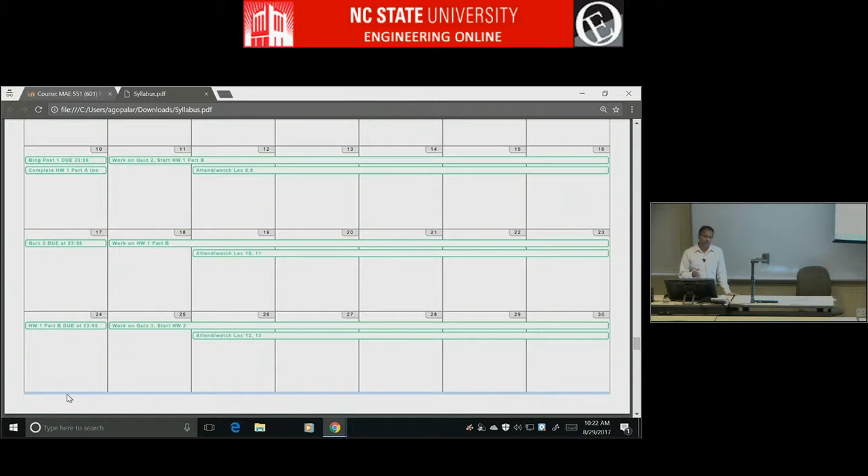So that's what this calendar has. Of course, some things are going to change as we go along. Maybe there will be some material I don't end up finishing, and we might postpone something a little bit. But this is the plan.

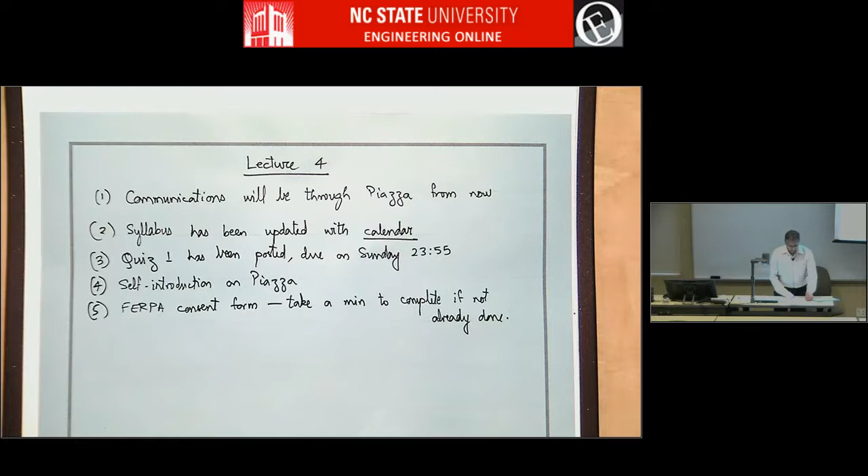In the last class we talked about CP distribution, this is from page 3-11. This was an example CP distribution, and the main thing is it's plotted upside down so that it looks similar to the velocity distribution, letting us think about those two plots in the same way instead of having to flip your thinking with one plot or the other.

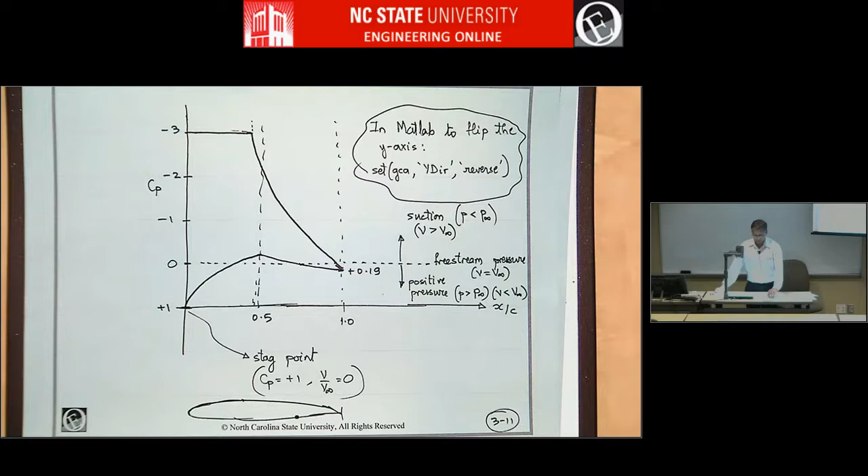From the CP distribution you get pressures, and that's where we stopped. Positive CP means it's a positive pressure, so it will press on the surface, and we have dF equals minus P dA, where dA is the elemental area vector pointing along the outward normal.

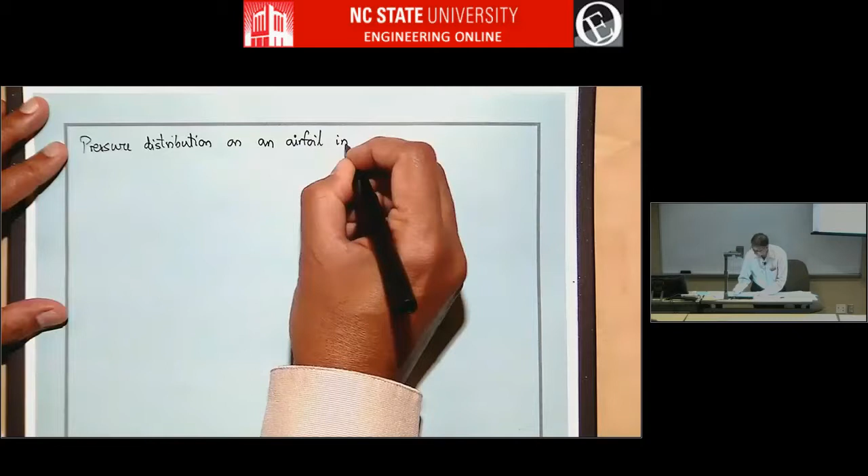Okay, so now let's see how we can proceed and calculate lift and drag and all those things. First, let's look at a pressure distribution on an airfoil in inviscid flow. This is just going to be a very representative pressure distribution - it's not always going to be like this, it's just for some airfoil at some angle of attack, and it will change for different airfoils and angles of attack, but this is just a representative one.

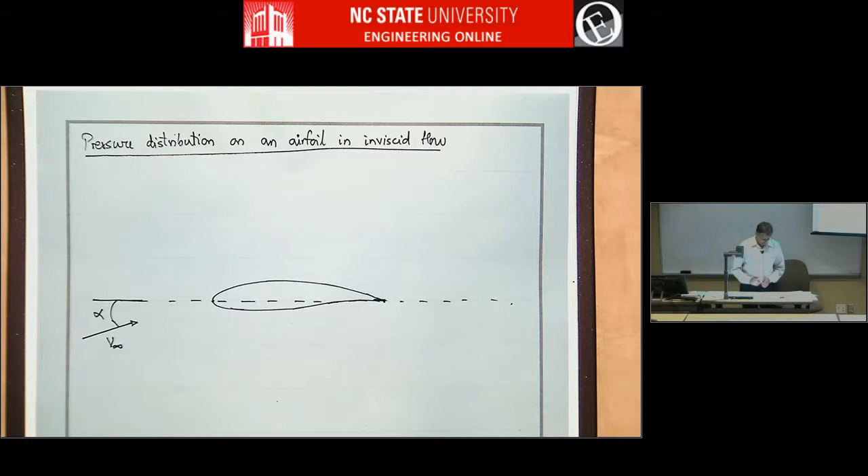Let's say here is an airfoil, and this is V infinity, this is the angle of attack. I usually draw this angle pretty large so you can see it clearly in the graphical sketches, but this is a very large angle of attack - usually angle of attack is something like 0 to 12 or 15. Okay, so you might have a pressure distribution like this.

Okay, so this might be some pressure distribution. This is an inviscid flow - inviscid flow means no viscosity, which means no boundary layers, no drag. As we shall see later, inviscid flows are a very useful approximation to study many airfoils and wing flow situations. So although they differ from reality, they are a useful approximation for many cases.

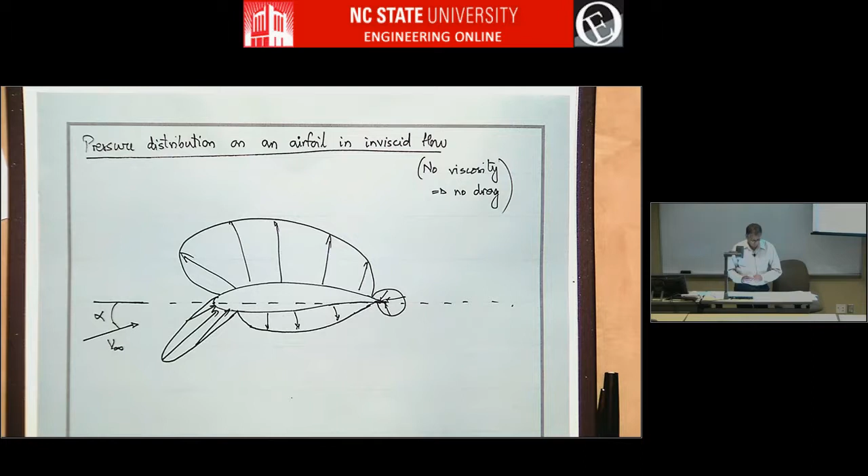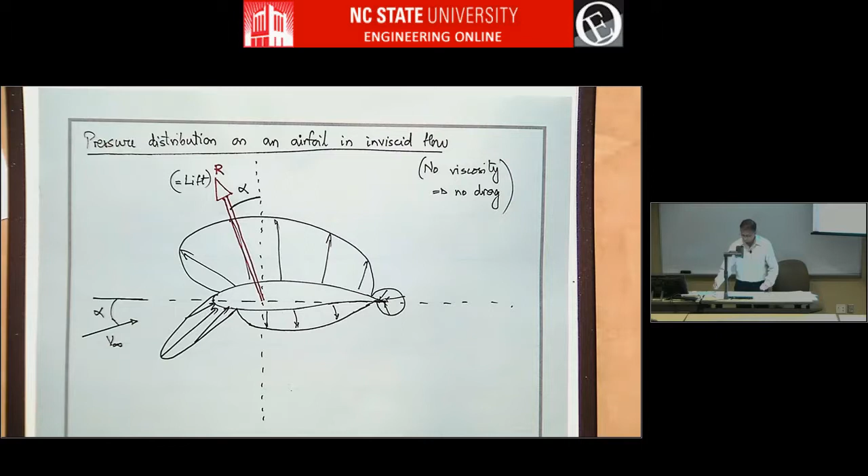So this pressure distribution will end up causing a resultant force, and this resultant force will be something like this. In inviscid flow, this resultant force will also act at an angle of alpha from the vertical, and this R is equal to lift. So R is the resultant force, and this is the force you will get if you integrate all these pressures, and this is equal to lift.

And lift by definition is the component - this is important to remember. We have a resultant force and the component of that resultant force in the direction perpendicular to V infinity is called lift. You will come across some situations, maybe not as much in this course but in other places, where you will wonder what lift is. Lift is always the component perpendicular to V infinity. In inviscid flow, the only force acting is lift, there is no drag. So the resultant force itself is the same as the lift.

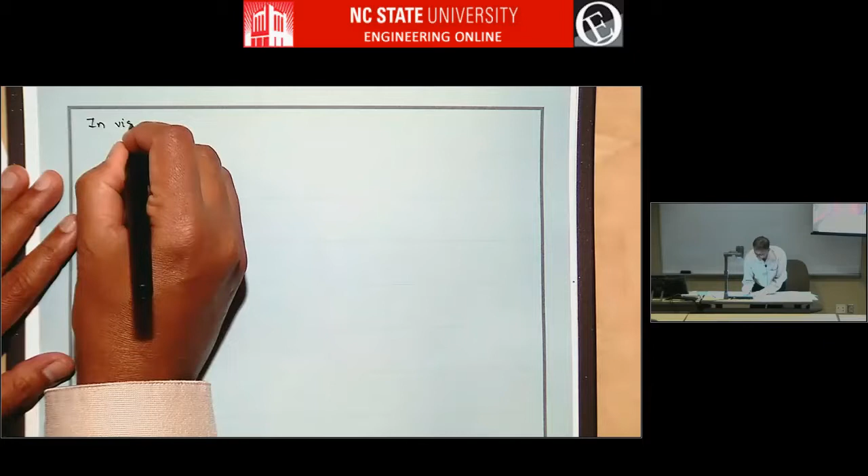That is, this is the more general case, which means, in other words, this is a real flow, not an approximation.

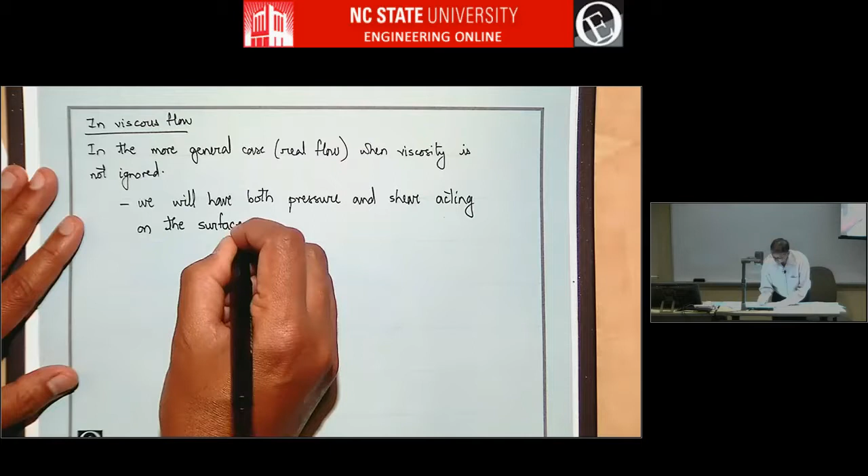So in these viscous flow cases, we will have both pressure and shear acting on the surface. So in the earlier diagram we had only pressure, but we'll have now shear force as well. And even the pressure distribution...

So in inviscid flow, if you integrate the pressure, you get purely lift, no drag. But in viscous flow, if you integrate the pressure, you will get not just lift but also drag. So this is called pressure drag. That is, there is pressure drag.

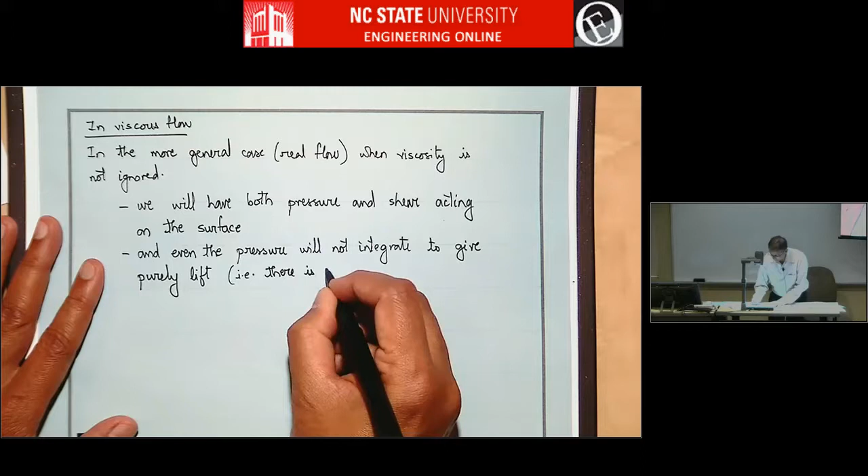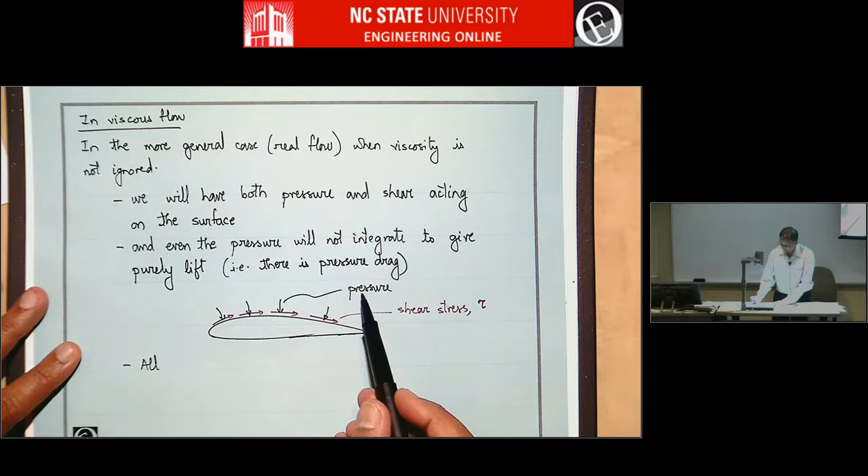Okay, so if I take an airfoil for example, you will not only have pressures, but you will also have shear stress. And shear stress is basically the frictional type of scrubbing kind of stress. And this is represented by symbol tau. And this is the pressure distribution. And on any body, all the aerodynamic forces come from the pressure and the shear. These two are the real only sources of aerodynamic forces.

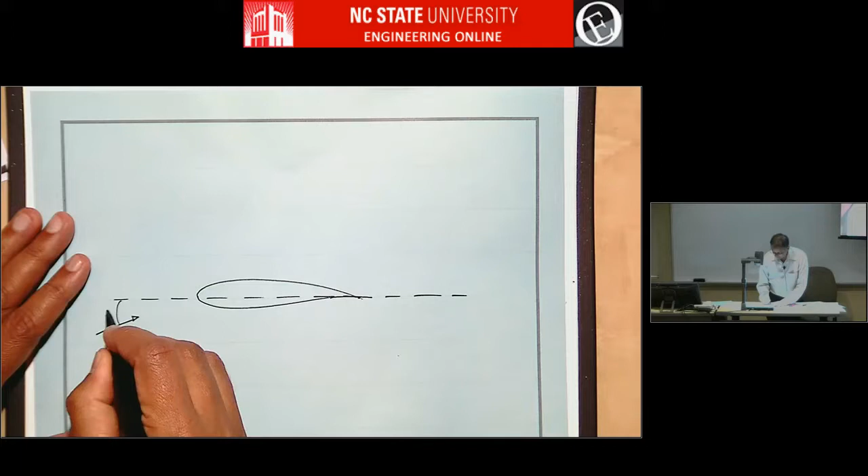So what happens in viscous flow is there is now lift and drag. So let's plot the force diagram on an airfoil in viscous flow. So we have an airfoil here, V infinity, and this is alpha, and let me draw a vertical line, and then let me draw perpendicular to the V infinity.

So this line is supposed to be perpendicular to V infinity, so this angle is alpha. May not be perfect, but it's just a sketch.

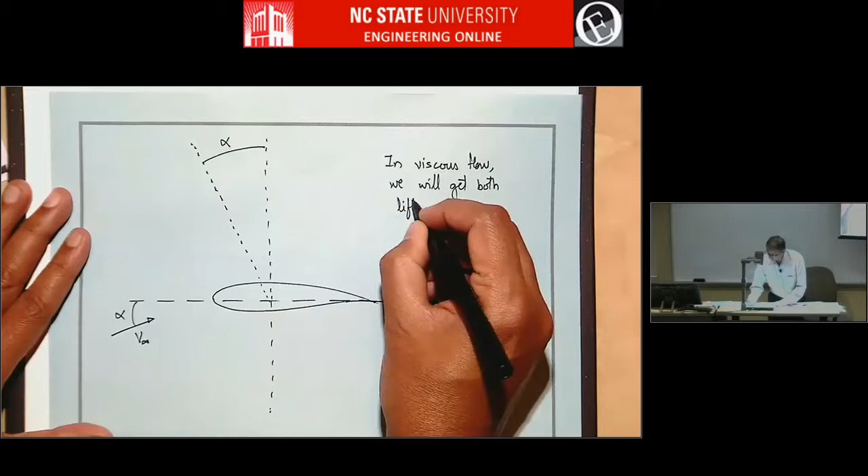So in viscous flow, we'll get both lift and drag. And so the resultant force will be a vector addition of lift and drag. So you might have a resultant force that looks like this. So we'll call this R, resultant force.

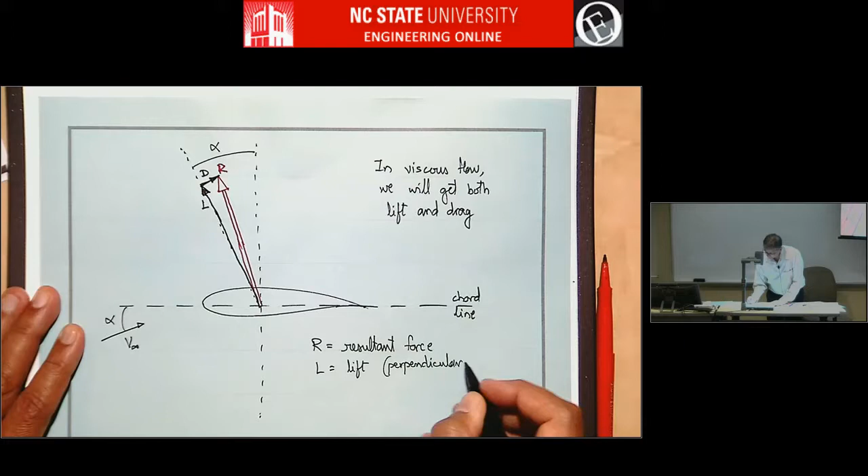So by definition, lift is the component of this resultant force perpendicular to V infinity. So you take this resultant force, this is perpendicular to V infinity. So you have a component perpendicular to V infinity and parallel to V infinity. So this is lift and this is drag. So R here is resultant. D is drag, and that's along V infinity.

In some situations, it's also convenient to decompose the total force, the resultant force, into normal and axial forces. So normal to the chord and along the chord. And I'm going to call that X and Y. So let's call this the X axis, and the Y axis is here. So I'm going to call this the Y force is this.

Sometimes it's called normal force with a symbol N, but really it's just different symbols meaning the same thing. And this force is called X force or axial force, A.

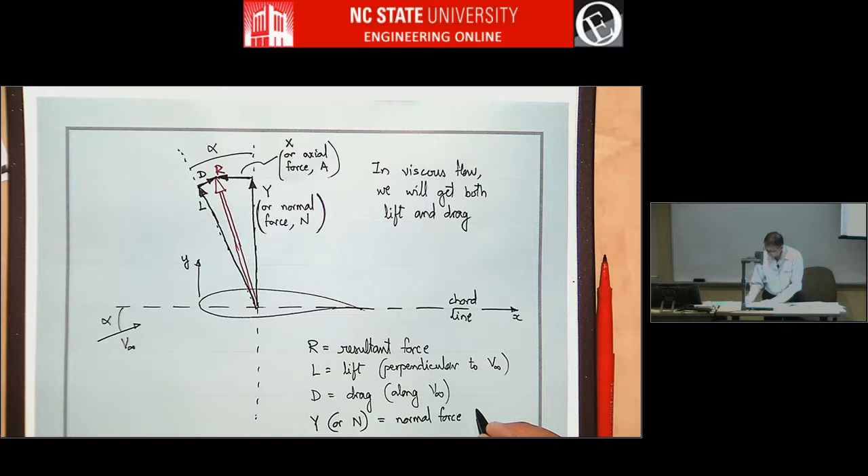So let's write these down. Y, or sometimes N, is equal to the normal force that is perpendicular to the chord, and X, or sometimes called A, is the axial force along chord.

And usually you will call X force positive along the X axis. So the X force as shown above is negative, right. So in this particular sketch the X happens to be in the negative X direction, so it's negative as shown in the sketch.

One of the things you see here is X is actually pointing towards the leading edge, which is, think about it, that's... it takes some time to get used to it, right. That means there is a force, and this is a completely legit force. This is a good resultant force for an airfoil. This is a normal kind of thing, this is not just a sketch, this can happen.

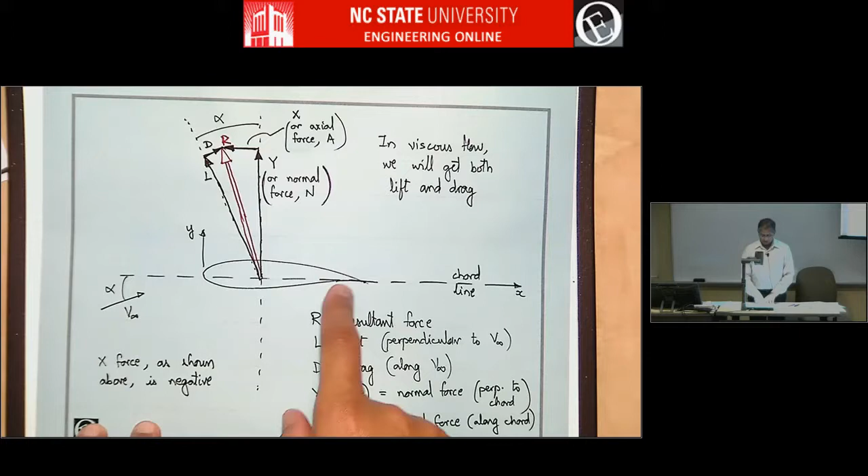It's opposite to V infinity. So the airplane is actually flying like this - we've just tilted it for convenience to make the chord horizontal. If this airfoil were an airplane flying horizontally, the airplane itself would be tilted up, so the chord won't be horizontal.

So just to sketch this - this is actually a situation where the airplane is like this, and then it's flying this way, at an angle of attack of alpha.

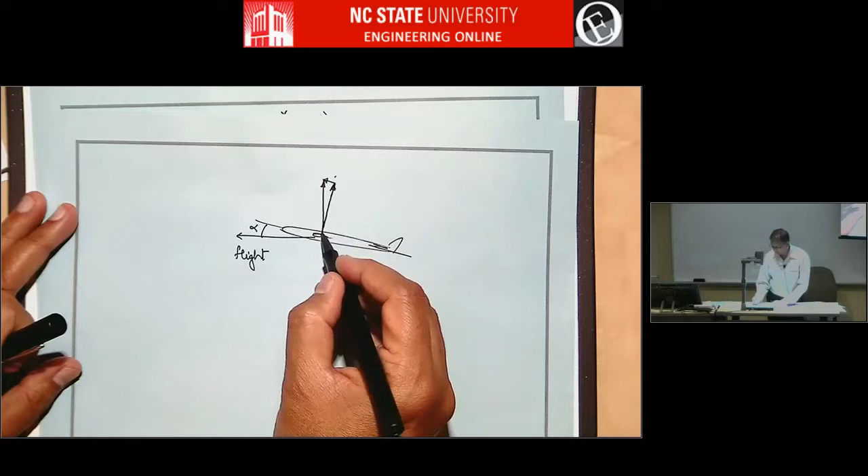When we say there's a component of force along the chord line, it's along the airplane, in this direction - that's not the flight direction. There's also a component normal to the airplane, and those two cause a resultant force like this, which does not have a component along the flight direction. So if you resolve it perpendicular to the flight direction, you get lift.

There is also a drag, opposite to the direction of flight. So it doesn't mean you don't need an engine - since the airplane is flying like this, if you want to maintain altitude and speed, you need a thrust force acting in this direction. In this sketch it's a small thrust force, but nevertheless you need it.

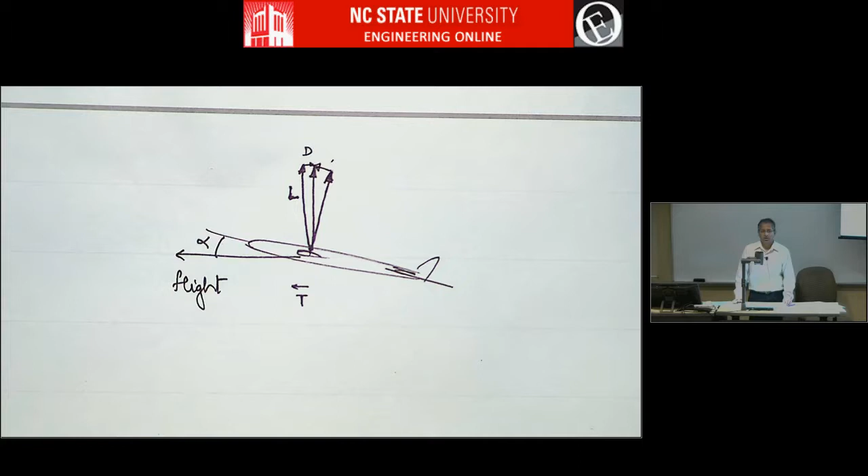If you don't have the thrust force, the airplane will either decrease speed if trying to maintain altitude, or descend if trying to maintain speed - both perfectly okay. But if you want level flight at this velocity, you need thrust, because there's drag acting opposite to the direction of flight.

It gets confusing because for convenience we often plot everything with the chord line horizontal, and if you resolve all the forces you'll get a force in the forward direction. Chances are, maybe 8 years down the line when you've forgotten this discussion, you'll be working in aircraft aerodynamics, get a forward force, and wonder where you went wrong.

It's actually perfectly fine. So just try to remember this.

Most of the time we don't use actual forces, we use force coefficients. So let's introduce the lift coefficient, which we'll use a lot - written as C subscript L, the coefficient of lift.

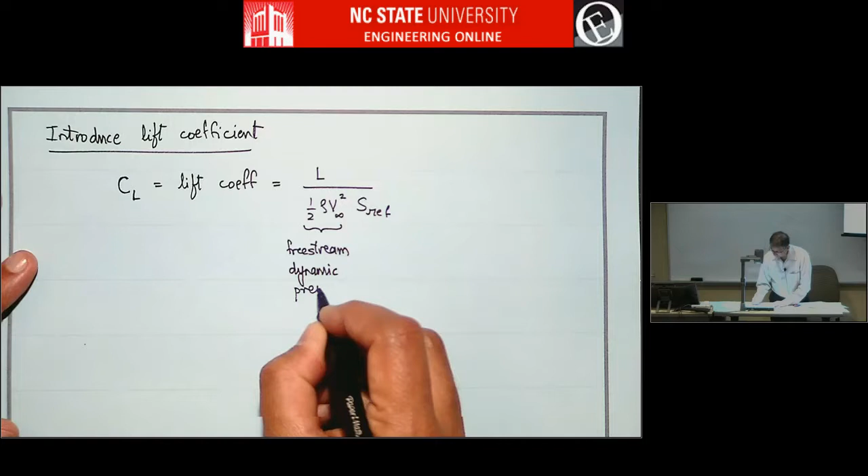Half rho V infinity squared is the free stream dynamic pressure. This is the lift, and this is the reference area.

So S ref is the reference area. For a 3D body - like a wing or airplane - for wings and airplanes, S ref usually is the planform area of the wing.

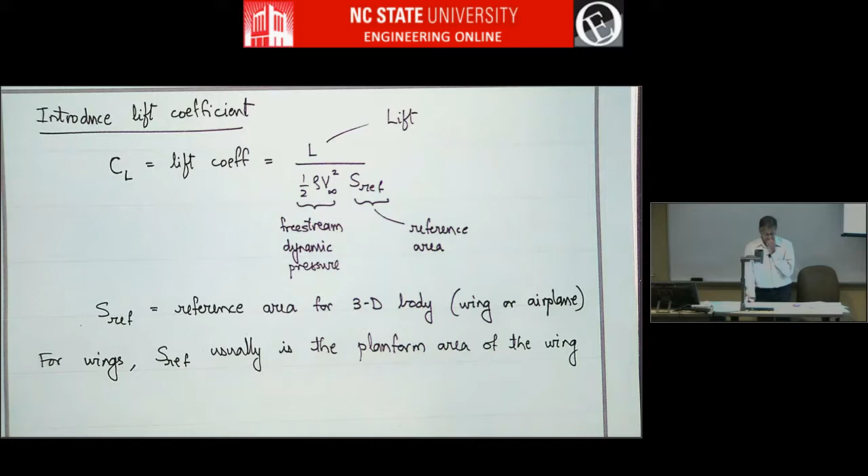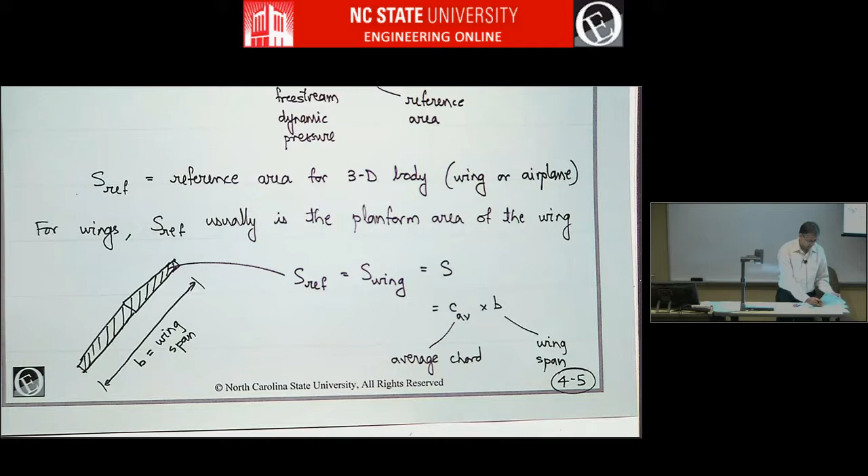This course is about airfoils, which are the 2D slice of a wing. So we do something slightly differently, but it's connected with what we're doing for the wing.

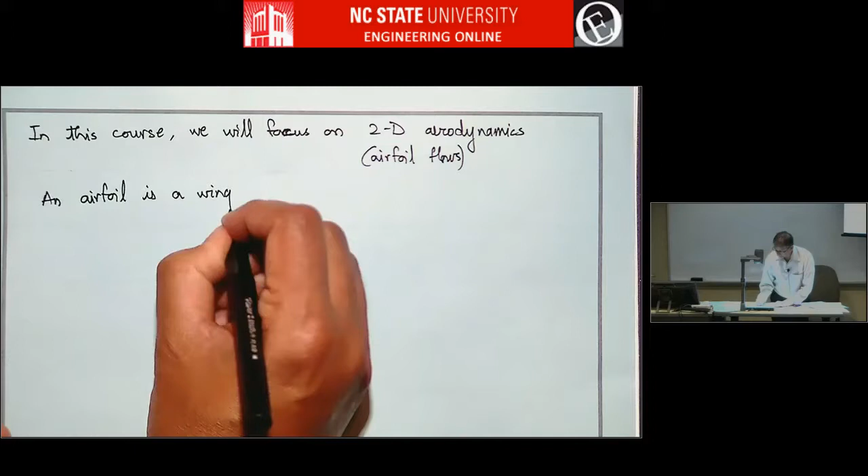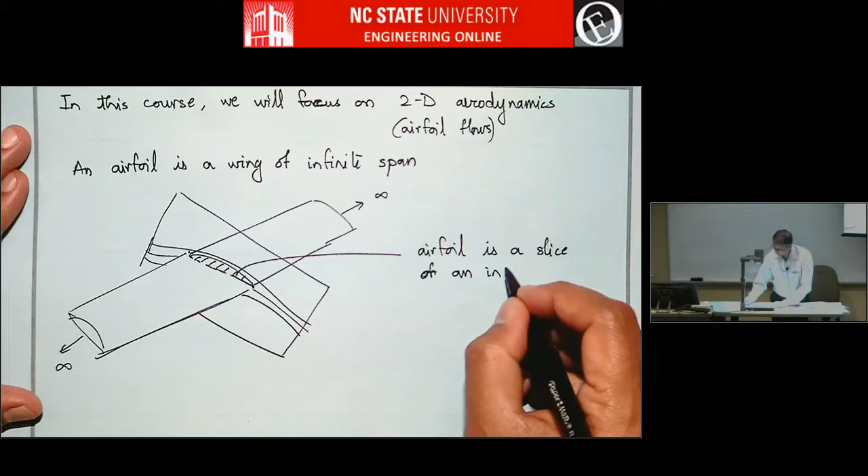An airfoil is really a wing of infinite span. If you take a wing that goes to infinity on both sides, we take a slice and look at the flow in this slice. This slice has 2D flow - because you can take the slice anywhere along the wing and it will be the same, so it's two-dimensional flow with no change in the span-wise direction.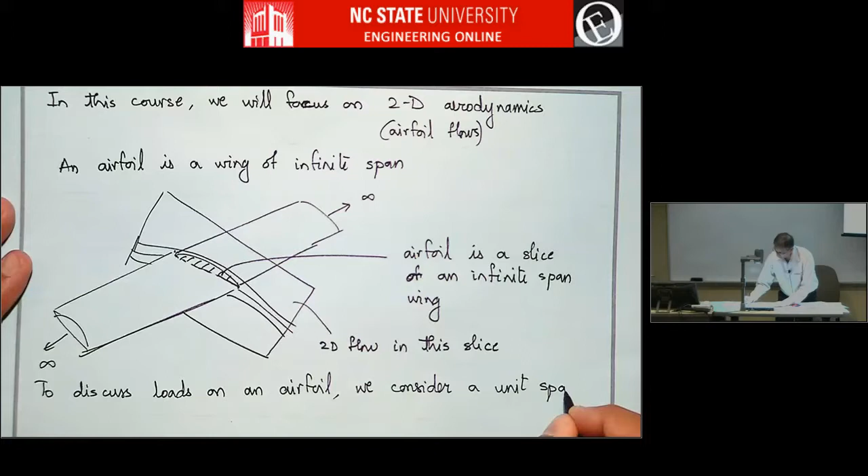To consider the loads on an airfoil, you need a certain amount of span, because you need area for pressure to act and cause a force. So to discuss loads on an airfoil, we usually consider a unit span, a span of 1 - in other words, b equals 1. So the wing area becomes b times c, which equals 1 times c, just c.

So now if we want to define lift coefficient, you have to think about a span of 1, and so it becomes like this.

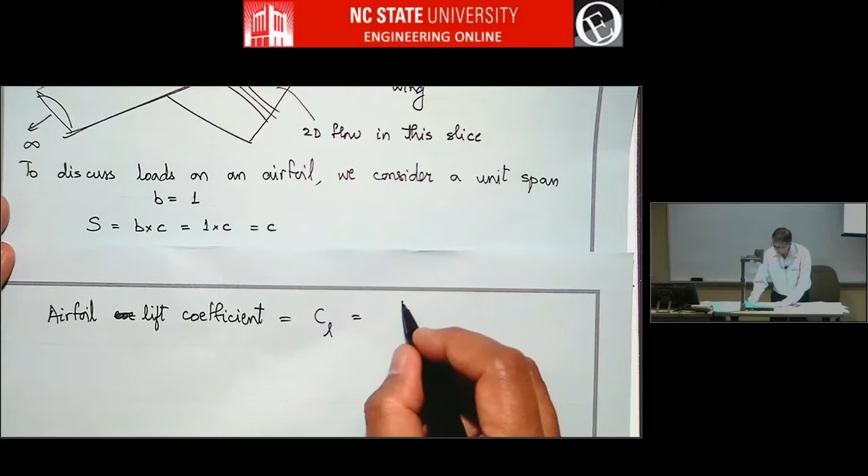So airfoil lift coefficient is different from wing lift coefficient in certain ways. This is written as C subscript small l, equal to lift over a unit span, lift on a unit span of an airfoil, divided by half rho V infinity squared times, earlier we had wing area, so now we have C times 1, and this is b equals 1. The important distinction here is lowercase l is used for 2D flow.

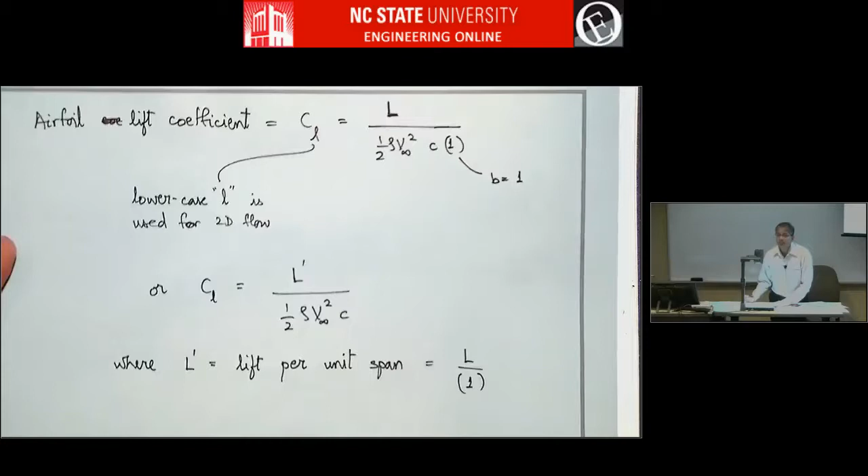Another way to think about the airfoil lift coefficient is you can write this as L prime over half rho V infinity squared C, where L prime is lift per unit span. So these two are the same thing. L prime has units of force divided by length, that is Newton per meter.

Just like lift coefficient, there is drag coefficient and pitching moment coefficient. In a similar manner, C subscript small d is drag coefficient in 2D flow, equal to drag per unit span over half rho V infinity squared times C. And Cm, C small m, is pitching moment coefficient in 2D flow again.

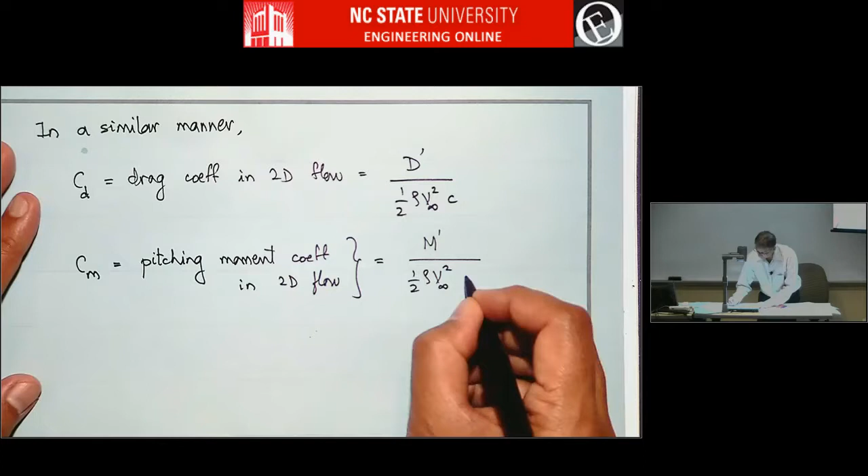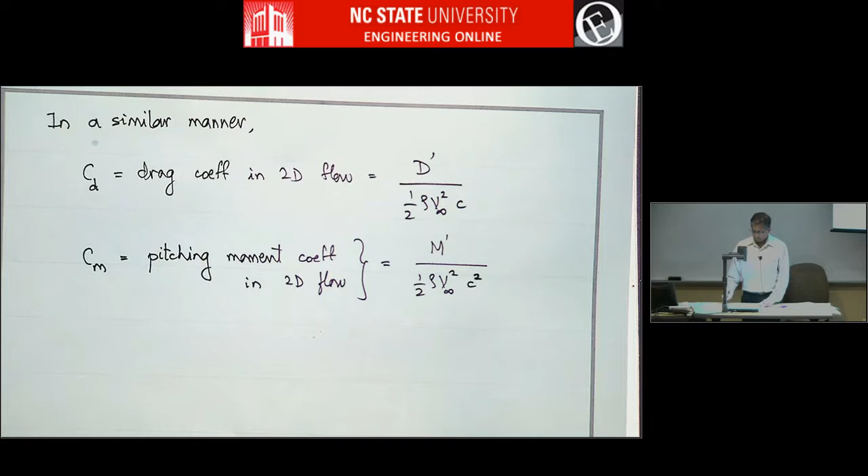Right, so is there a problem here? Yeah, C squared. So if you think about it, this is moment per unit length, and if you look at this dimension, it won't be moment per unit length. So you really have to have C squared. This is a very typical mistake people make. We'll be working with lift and drag coefficients a lot, and we'll always be writing half rho V infinity squared C here in the denominator. But then when you go to moment, you need C squared.

These are just like definitions. So here d prime is drag per unit span, and m prime is pitching moment, the actual physical pitching moment per unit span.

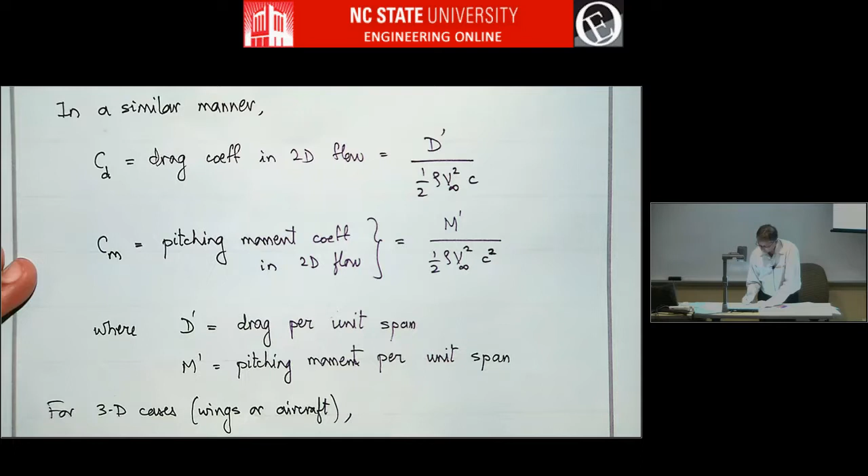For a 3D wing, for 3D cases, wings or aircraft, pitching moment coefficient is slightly different. It's written as C capital M, just like CL and CD for 3D. C capital M is for pitching moment coefficient, and that is moment for the whole airplane or wing divided by half rho V infinity squared times S ref times C ref. So in wing theory, for example, we'll be using something like this, or in airplane flight dynamics, this is what you use. In our course, we'll be dealing with 2D flows, so we'll just stick to this part.

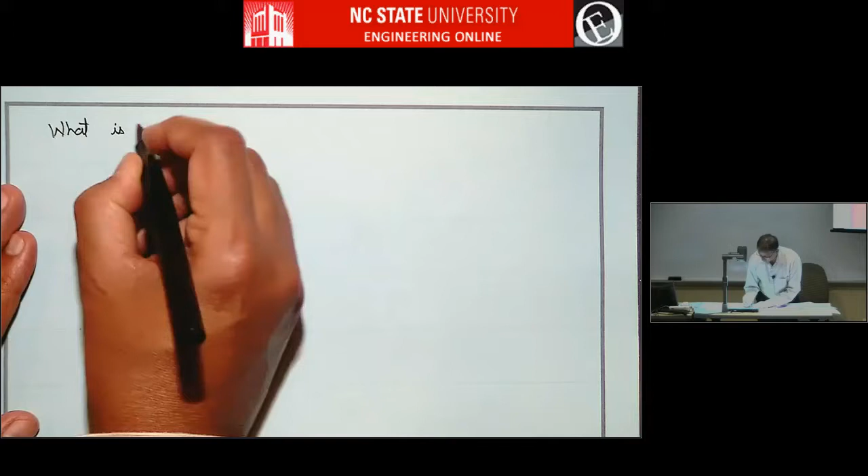Okay, so what is pitching moment? Lift and drag are fairly familiar, let's just quickly review what pitching moment is. So in the earlier picture, I drew an airfoil and then I drew a resultant force. Usually, in addition to a resultant force, there is a moment that accompanies the force, and this moment is called M, and this is the pitching moment.

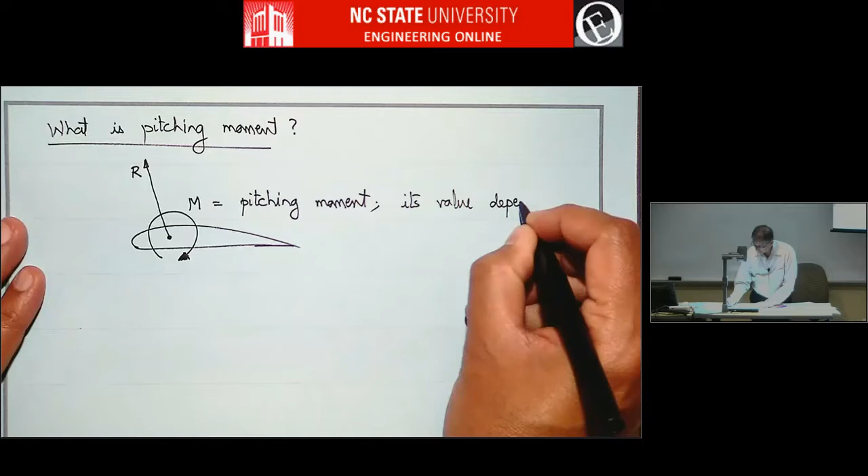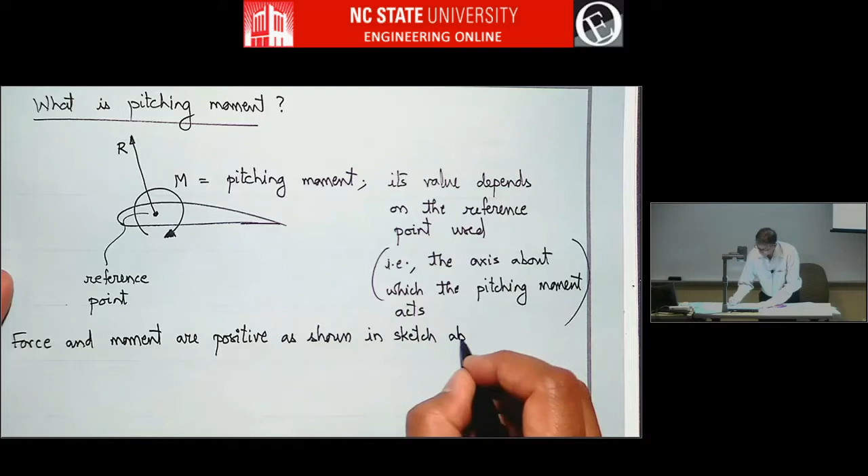It's called pitching moment because in an airplane it pitches the airplane up or down, right? And its value depends on the reference point used. In our case, this is the reference point. Reference point is just another name for the axis about which the pitching moment acts. So this is the axis in this picture. The force and moment are positive as shown. So this is the positive direction of pitching moment. Nose up is positive, that's just sign convention.

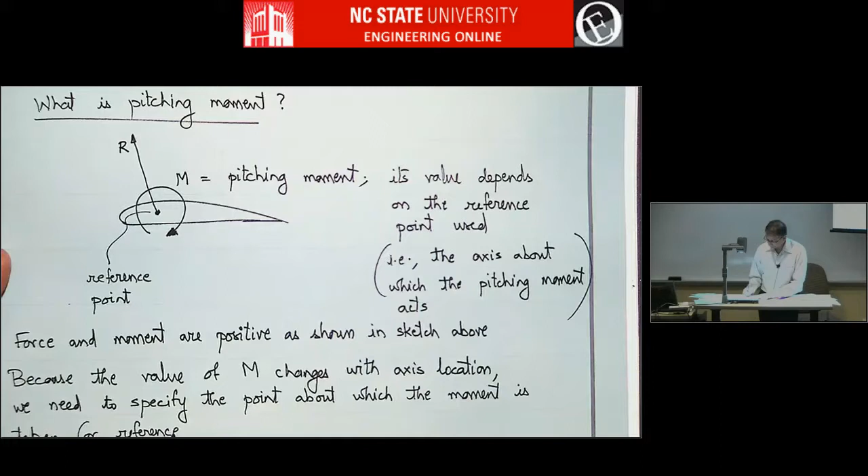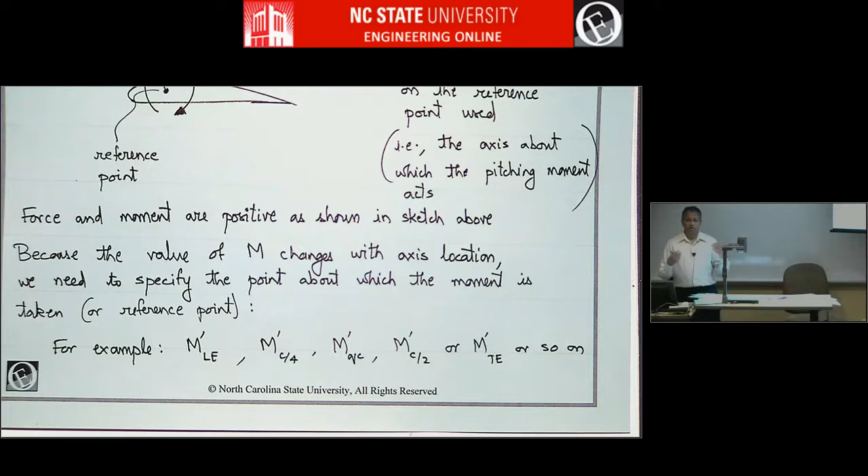So because the pitching moment depends on the axis location, we have to say about what axis we are looking at the pitching moment. In other words, we have to specify the reference point. For example, we have to say are we talking about moment about the leading edge, or moment about the quarter chord, which is also written as QC. Sometimes you look at M about the half chord or trailing edge and so on. So just saying pitching moment is some value is not complete information, you have to say about what point the pitching moment is written.

Okay, we'll be looking at this in much more detail as we go along, so this will start to become familiar when we apply it to some examples and cases. Okay, so one of the first exercises is to calculate lift and pitching moment and drag from a velocity or CP distribution. So let's spend some time talking about that. Any questions so far? So an early exercise will be to integrate the CP distribution and compute lift and pitching moment and also drag.

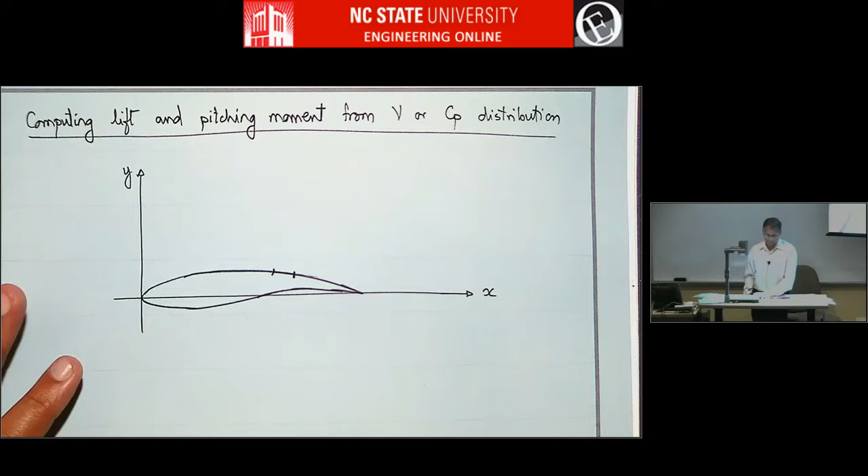So we are going to take some airfoil and take a small portion of it that we'll call a panel. This panel goes from point 1 to point 2. This point has coordinates x1, y1, and this point has coordinates x2, y2.

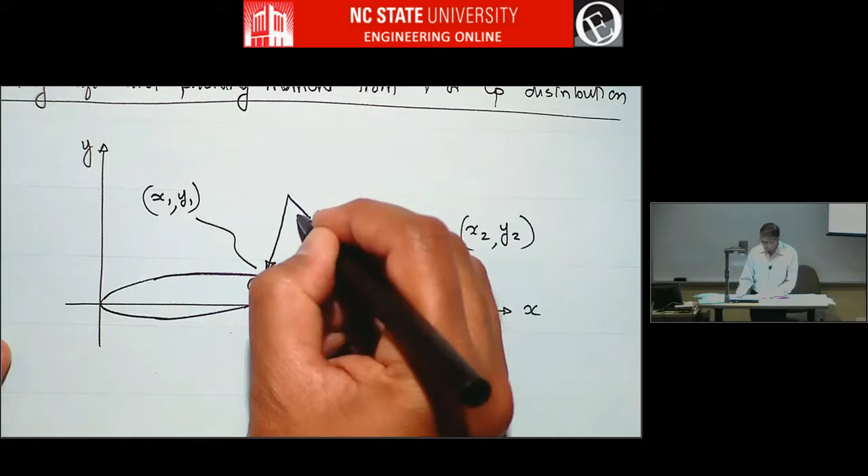Let's say the pressure at point 1 and 2 are P1 and P2. If we assume they are positive pressures, they'll press on the surface and cause a force downwards, so you'll have a pressure distribution something like this. This is P1, this is P2.

We can assume the panel is small and flat. In reality the airfoil surface is curved, but if you divide the airfoil into lots of little panels, you can assume each one is flat for purposes of integration. So even though the surface may be curved, we'll assume it's a flat panel with P1 pressure here, P2 pressure here. I'm drawing it at large scale so we can look at it more clearly.

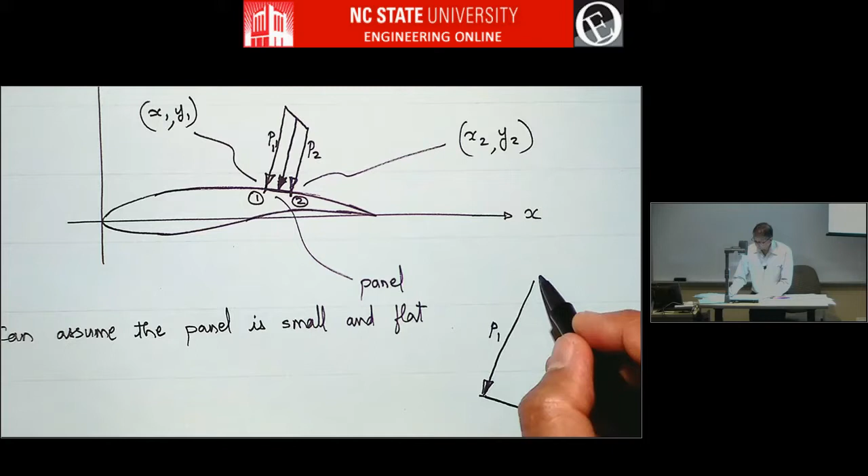For purposes of integration, if you divide the airfoil into lots of panels, you can assume an average pressure acts on this panel. A uniform constant average value acts here, and that is P1 plus P2 over 2.

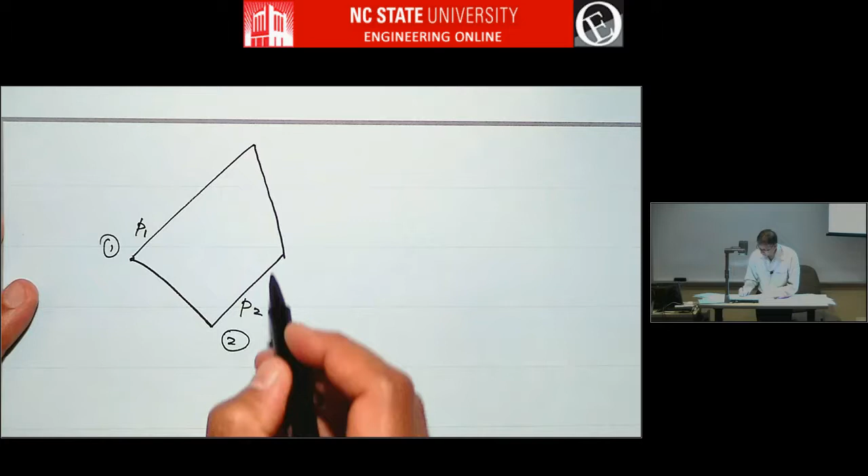This is P1 plus P2 over 2, and this is the airfoil surface. This distance is ds, where d is for a small element and s is the arc length along the airfoil. Let's say this angle is some angle theta, the angle formed by the normal to the panel with the horizontal axis.

So let's say there is a force dF acting on it, and I'll draw the force like this. dF is the force acting on this panel due to this pressure. So what is this dF? With all these things we know, can you write the expression for dF?

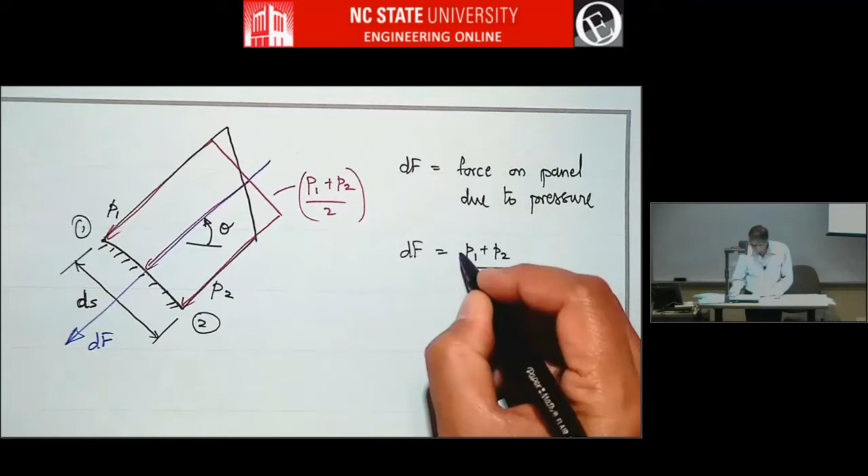P1 plus P2 over 2 multiplied by ds, but this is not units of force. Pressure times length is... you usually need pressure times area, right? So what's going on? Yeah, times unit span. Airfoils will always consider a unit span in the span-wise direction, so let's call that dz. So this is, well, we'll put a dz and then set dz equals 1 for convenience, since this is the span-wise width of the panel.

So let's put this in the xy axis system. We have x here, y here, and this flat panel goes from 1 to 2. This distance is ds, this distance is dx, so dx is x2 minus x1, and this distance is dy, which equals y2 minus y1. In this illustration, dy is negative.

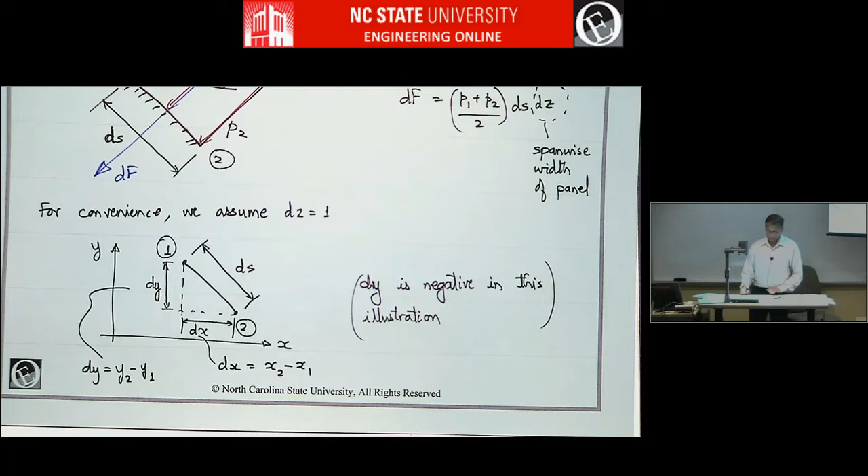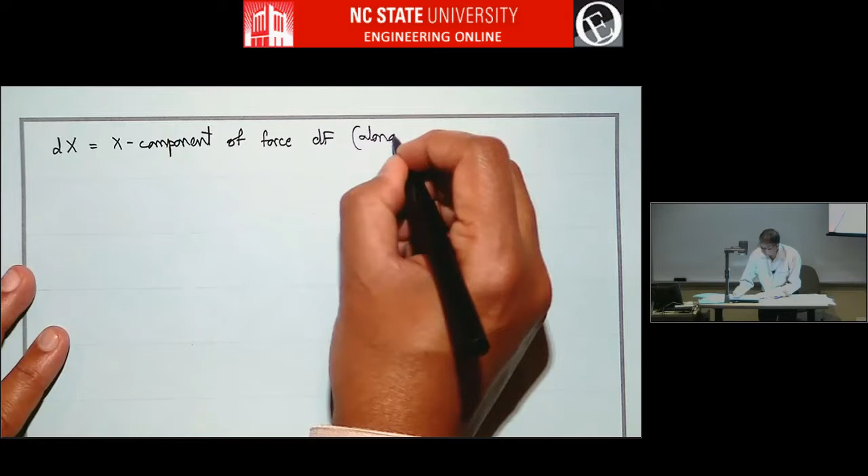So we have this force dF, and we want to decompose it along the x and y directions. Let's write the x component of the force as d capital X, and we'll call capital X the component along the positive x direction. Likewise, d capital Y is the y component of dF along the positive y axis.

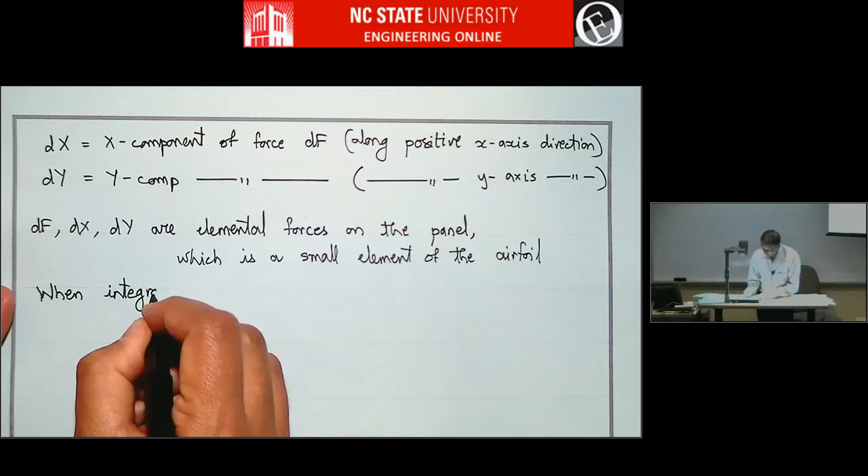This is just the usual differential notation. dF, dX, dY are elemental forces on the panel, and we call them elemental because the panel is a small element of the airfoil. When integrated over the whole airfoil, or summed up in a discretized fashion, we get the total force F, the x component and the y component forces.

In the previous page we wrote dF equals P1 plus P2 over 2 times ds times dz, and we'll stop using dz since we always set it to 1. We can now decompose dF into dX and dY. If this is theta, what will dX be? dF cosine theta. So d capital X is dF cosine theta, and if you write dF in terms of the pressures, it becomes P1 plus P2 over 2 times ds times cosine theta.

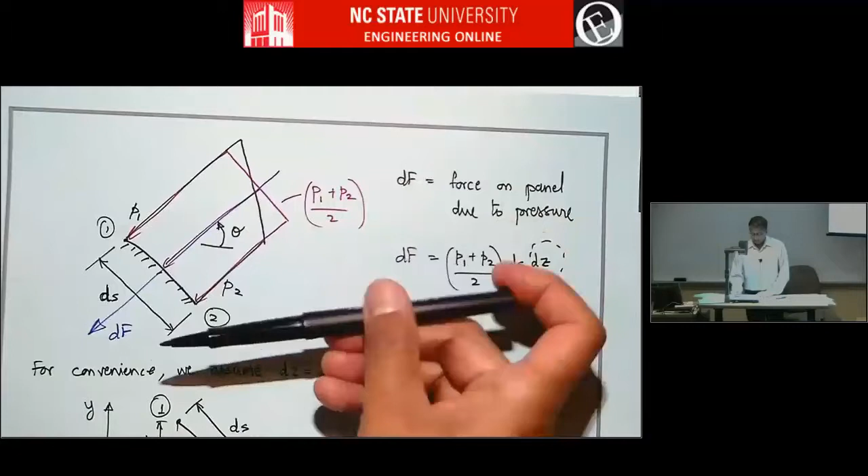Now the question is, will this be plus or minus, and will that sign carry over here? In this particular case, dFx will turn out to be in this direction, so you've got to think about it carefully. I won't say whether it's plus or minus, just something to be careful about. Let's keep carrying the sign ambiguity a bit more, so you can write this as P1 plus P2 over 2 times dy.

Right? Does it make sense? Why can we write it like this?

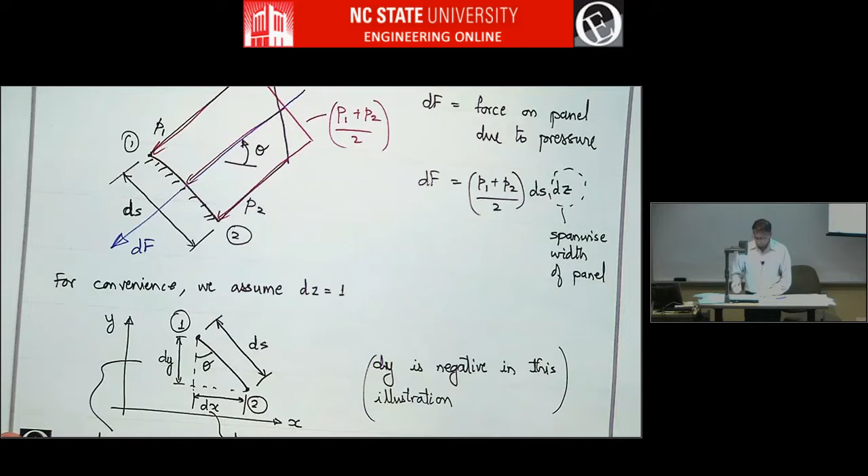Yeah, ds cosine theta is equivalent to dy. So theta is the angle between horizontal and the normal to the panel, and that will mean vertical to the panel. So this angle is theta.

So ds cosine theta is actually dy. I think it's usually preferred, and it causes less numerical error to not handle angles. If you can handle displacements and lengths, it just works out better most of the time. So that's because dy equals ds cosine theta.

So I'm going to leave this ambiguity here. We'll talk a little bit more about it as we go along. There are some subtle reasons for what is the correct sign to use, not just in dx but also in dy. So think some more about it.

So df is like this, and in this particular case you will have dx this way and dy this way, and this is the direction of positive x force.

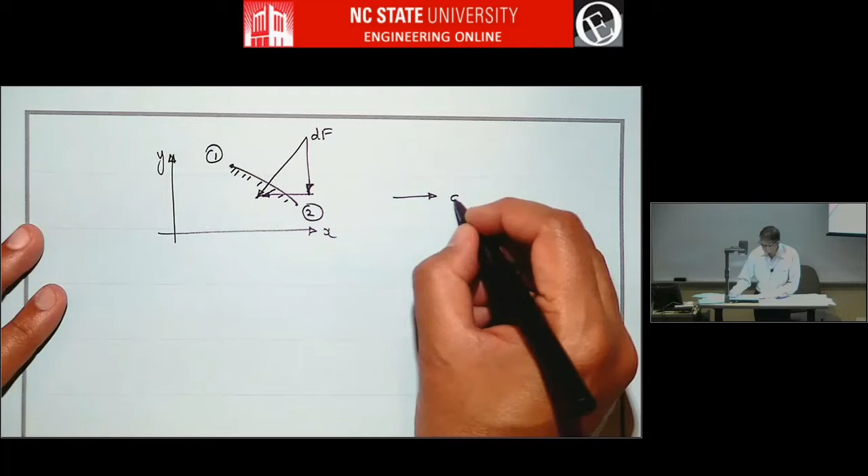So let's look at it here. So what do you all think? Should this be plus or minus? dFx is plus or minus p1 plus p2 over 2 times dy. Should it be plus? Minus?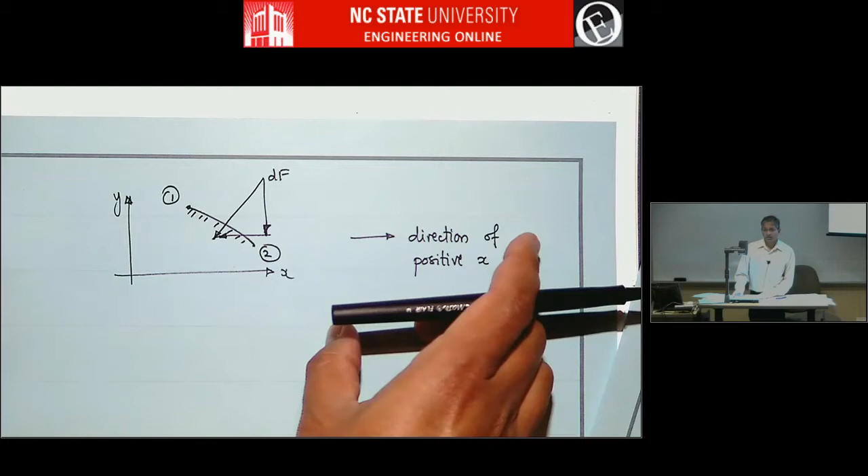So we want, if you just take the df, this is positive df, if you just take the component of df along the horizontal axis, you'll get this way, but this is direction of positive x, so you feel like it should be negative. So should we put a negative sign here?

So how many think it should be positive, how many negative? You don't have to feel bad or good about giving the answer, just let's do a poll. How many think positive? In life you should think positively, but no, in this question. 1, 2, 3, okay, 4. How many think negative? Okay. How many don't want to think? It's just the morning, so you shouldn't be so tired.

Okay, actually in this case, dx will be positive.

So somebody who said it's positive, why do you think it should be positive? Yeah, in this particular panel, dy is also negative, right? So it's always 2 minus 1, so y2 minus y1 in this particular sketch, dy is already negative. So if this is negative, if you have positive pressure, dx will turn out to be negative, so it's the correct direction for this sketch.

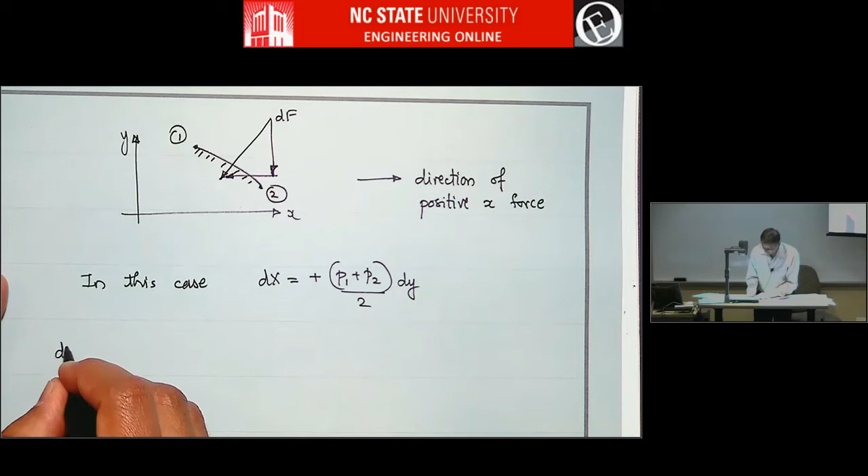So now let's talk about d capital Y. So again you have average pressure times what will come here? Dx, and this is like, I'm going to leave this ambiguous, plus or minus. Right, so this is essentially ds sine theta, which will become dx. So that's why we are putting a dx here.

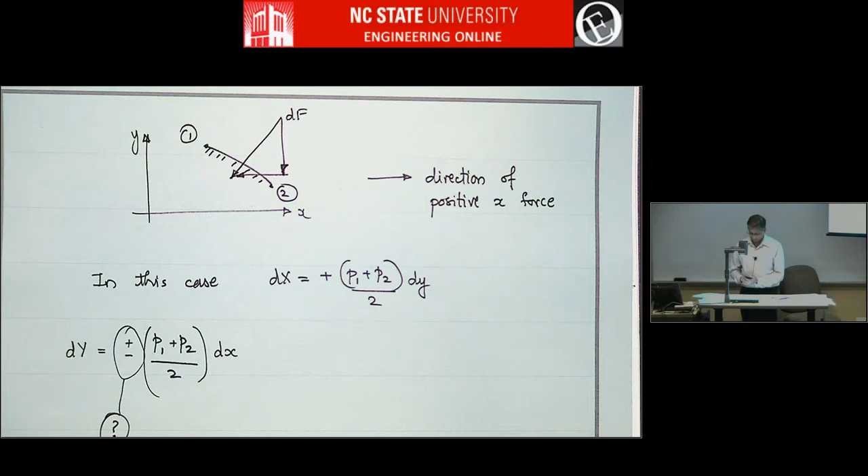Okay, so the df, positive df is this way, the vertical component is downward, and direction of positive y force is this way.

Will be along the positive y direction. So this sketch will give a negative y force, which means you would say you should put a negative here, right? So that this turns out to be negative. Is that so? But then it kind of didn't work out that easily with dx.

So what do you have to do? Plus or minus? Let's do a poll again. How many think it's positive? Okay, how many think it's negative? Some of you are now too nervous, you don't even want to answer.

So in this case dx is positive, x2 minus x1 is already positive in this sketch. So you will have to put a negative sign here in order for this dy to turn out to be negative as per the sketch. So in this case, d capital Y is minus P1 plus P2 over 2 times dx.

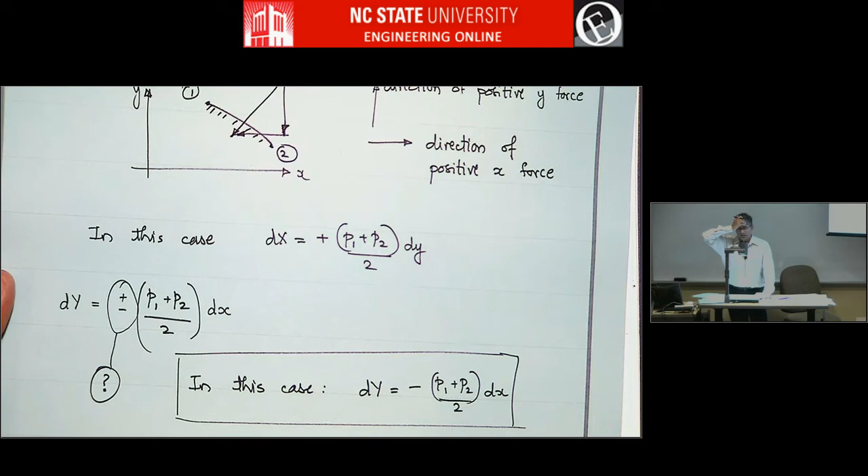Now this seemed very trivial when you start, but these pluses and minuses can trip you up very quickly. And this is for a panel orientation like this.

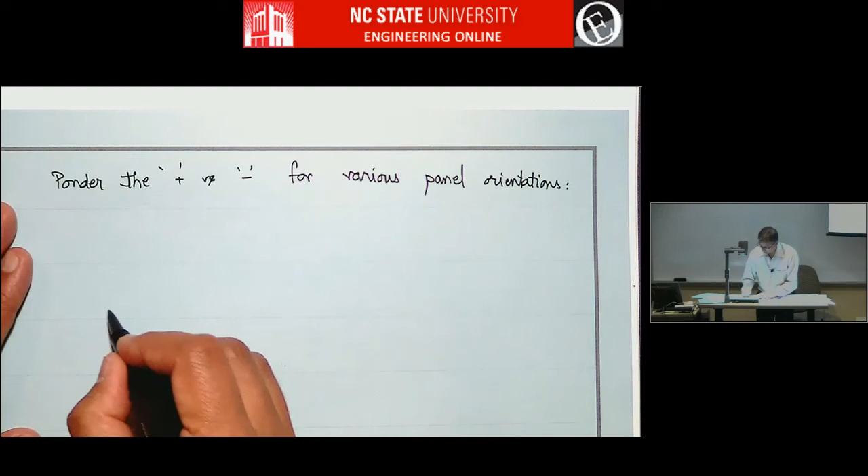So if you have a different panel orientation, what will happen? On an airfoil, this is the kind of panel we were looking at, it's facing up and aft. You could have a panel like this, facing up and forward. You could have a panel like this, facing down and forward. You could have a panel like this, facing down and back. In all these cases, will you use plus or minus for dx and dy?

So that's the sort of thing to think about, and that will be needed for your programming assignment in homework 1. So for today we'll stop here and we'll resume on Thursday.